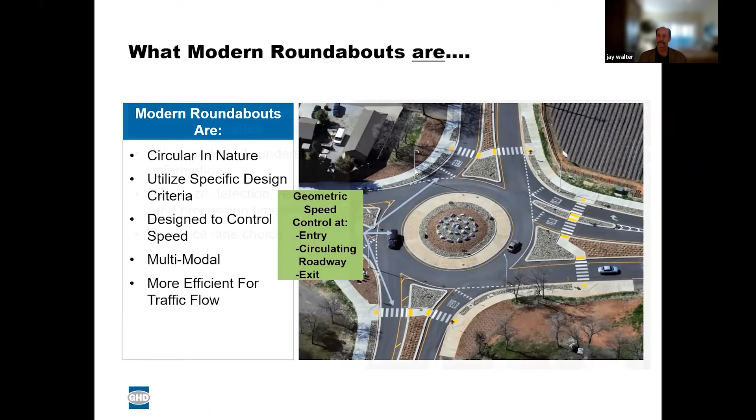So this is a picture of a traffic circle that probably many of you have seen and driven on recently, the one over at the Holman Highway, Highway 68, right there in Monterey. GHD designed that roundabout, and essentially you can see that the markings and the direction that vehicles are supposed to go is easily understood. This is one that has had a really, really good reaction from the community, as well as from a performance standpoint. And it seems that after initial skepticism, residents and folks that need to get through this intersection are finding it meets their expectations, and they're happy about it. It has not created any adverse problems that some had thought it would.

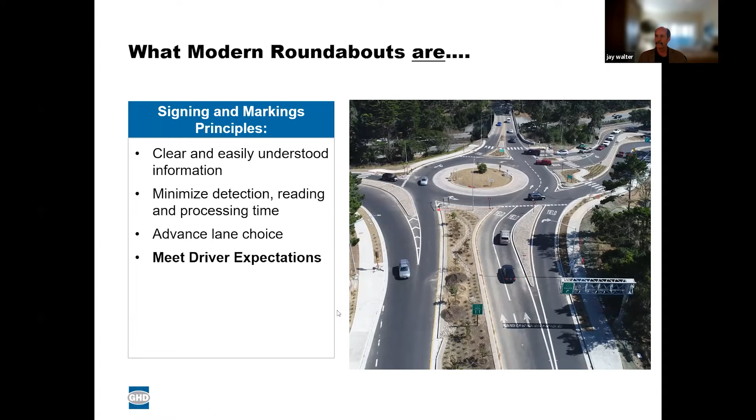So the modern roundabout will accommodate, as I mentioned, persons with disabilities that need special crossing, regular folks that are just trying to get from one side of an intersection to another, cyclists who can go through the roundabout like a vehicle, emergency response vehicles, and large trucks. That's part of what our design does, is it accommodates those large vehicles to be able to make that circle and go in the direction that they want to go in. We'll get into the design elements a little bit later.

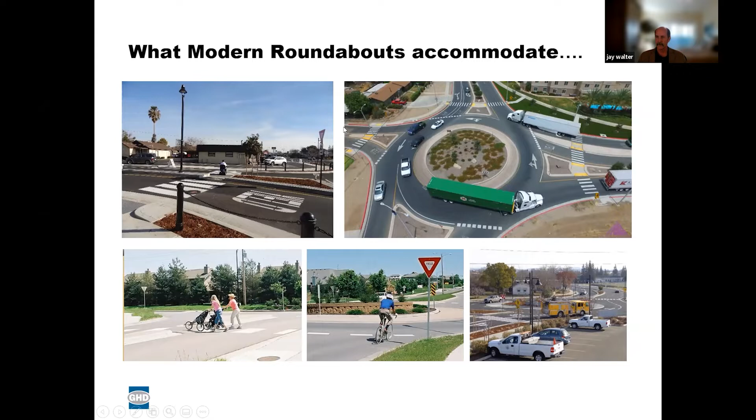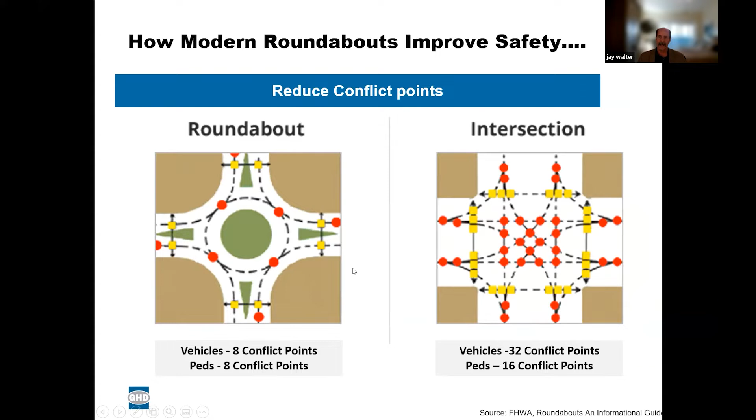And how does it really do that? Well, we call it reducing conflict points. So a standard intersection, a four-legged intersection, as you can see on the right, the vehicles that enter that intersection have as many as 32 conflict points with other vehicles and pedestrians. And pedestrians have at least 16 conflict points with vehicles as they try to cross the street. The roundabout is different. By separating the pedestrians from the vehicles, you reduce the conflict points for both pedestrians and vehicles together. So that's one of the primary reasons that roundabouts have shown improved safety from a collision standpoint.

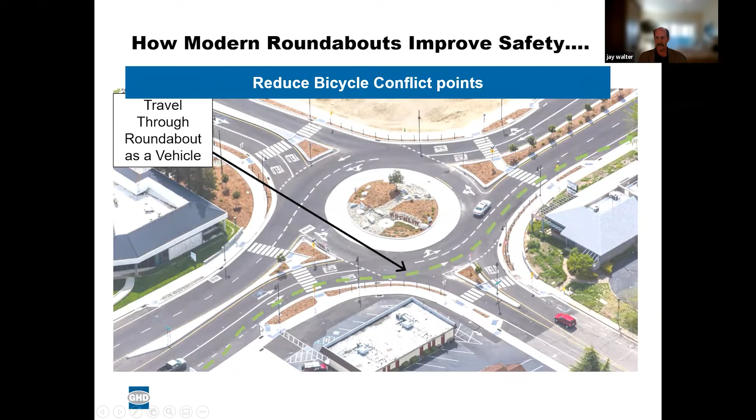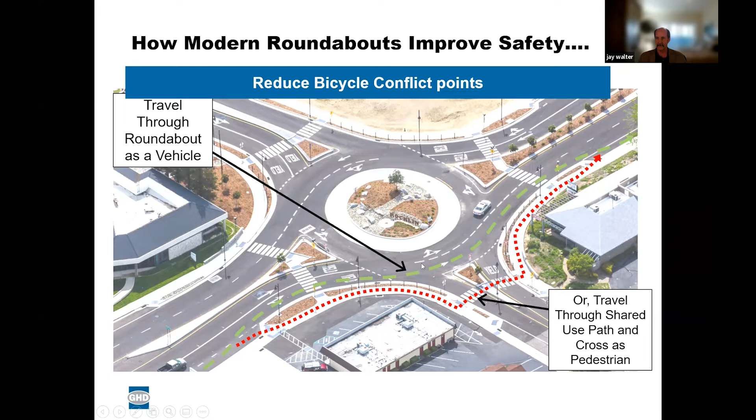From a bicycle standpoint, this two-lane roundabout is one a bicyclist may want to traverse. You can go through the roundabout as the green line shows, following through as a vehicle would in the traveled lane. Or if you're not so confident, you can move off to the side and take the pedestrian pathways through the roundabout intersection, then back into the bike lane. We allow for a couple of different ways for bicyclists to navigate the intersection, because traditional large signalized intersections are often very challenging for cyclists to navigate safely.

Same thing goes with emergency vehicles. There's a concern about response time delays and other issues like that. But the roundabout, center island, and roadway areas are designed to accommodate these larger vehicles as they circulate through. In the City of San Luis Obispo, the fire department and police department have both signed on very well to the concept of roundabouts, and the fact is it does not delay their response times to any significant degree.

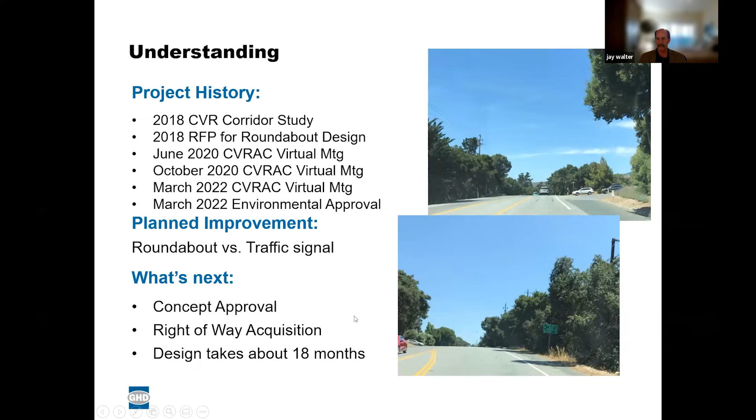We've been making progress, and hopefully keeping the community informed as well. So what's next? Concept approval is certain, and we're moving into the design phase and right-of-way acquisition, which for this project will really be the temporary construction easements needed for the construction project to be built. We expect about 18 months to complete our design, and then we'd be ready to go out to bid.

So we've had some time to understand the intersection characteristics, and we know that from several directions there is limited intersection sight distance. A driver stopped waiting here often has to inch out further before they're sure they can turn left onto Carmel Valley Road, or even turn right. We know there are bus stops, transit activity, and pedestrians in this vicinity, so that will be accounted for in our design.

And we know that there is a serious steep grade that descends down to the intersection coming off of Laureles Grade Road. I'll have more to say about that in a little bit, as we've had some additional direction from the county in terms of what we want to share with you tonight.

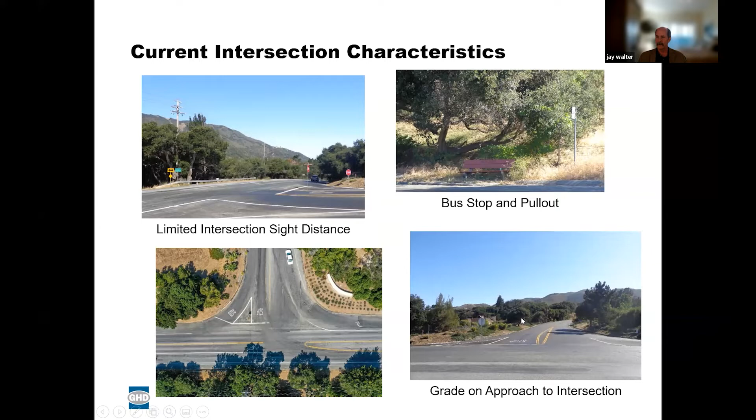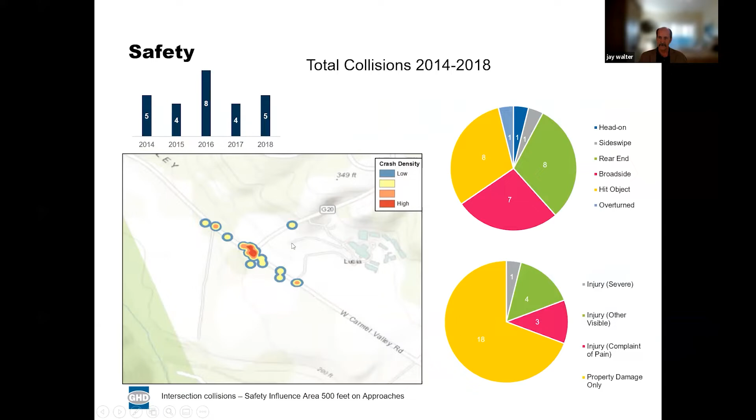So safety at the intersection is obviously a concern, and as you can see, there's been a concentration of collisions at the intersection and nearby. The roundabout is, as I mentioned before, the preferred intersection control to help reduce those collisions and their severity.

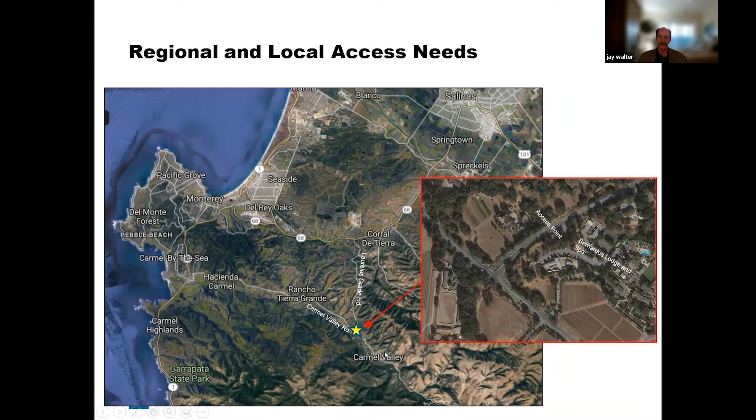We also know that this intersection with Laureles Grade Road, which runs over the top of the hill to Highway 68, and Carmel Valley Road, which proceeds on to the west and east back down into the valley, is a very important connection for regional and local access needs. For the vehicles that have to get back and forth through here, we need to make this intersection as efficient and safe as possible for all users.

We looked at this with a matrix, and we spent some time with county staff judging various things as positive or negative based on the position of that center island. We determined that balancing right-of-way impacts, trying to reduce environmental impacts of these alternatives, making sure we're taking into consideration multimodal use, and also the staged construction of the project, in order to reduce and minimize as much as possible the disruption once it's built.

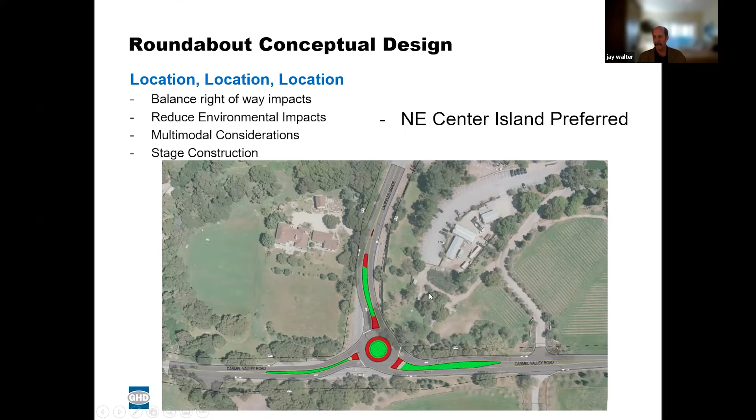So this is the one that the environmental review was based on, and the concept was approved by county staff as the preferred alternative for that purpose.

So we know based on the history here that there are many project issues. Cost efficiencies - we know the county really needs to be aware of how much this project will ultimately cost. We know there are many special events throughout the valley, throughout the year, that rely on this intersection in a very critical way. We know that residents, business owners, and tourists - we want to minimize disruption during construction.

We know there's an element of potential emergency evacuation for these routes, and one only has to be aware of forest fires occurring around the state to know that critical and efficient emergency evacuation is important. And then we know this downhill grade to the intersection - we need to try to figure out some way we can help deal with that.

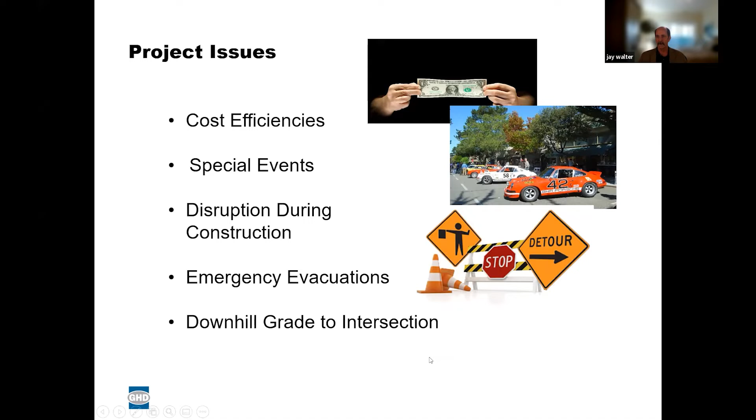It does accommodate a California legal design vehicle, meaning those large trucks we saw in the video can circulate through here, and it has a steep approach on the grade as the project has been built.

Which is very similar to the grade of Laureles Grade coming down into the intersection. So this roundabout was designed and constructed by GHD. We spent considerable time on the design in the middle of this center island and the roadways as they approach, to make sure we didn't have a cross section or slope that could cause a large vehicle, when turning, to get off center and potentially tip over. We call it a hand grading solution for roundabout control in this particular issue.

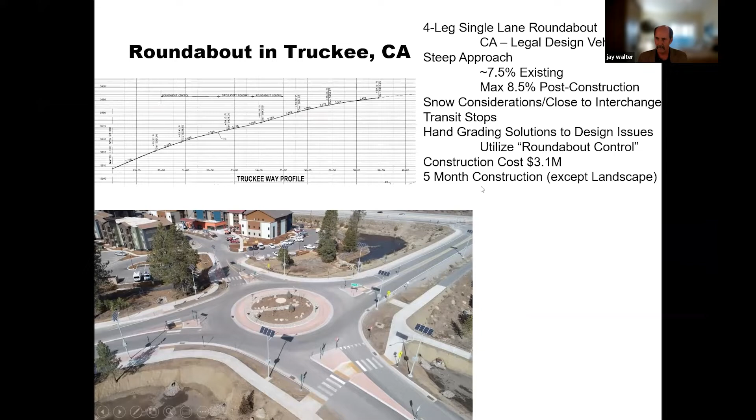And it's something we've gotten very good at. The project took about 5 months to construct, not a large amount of time, but similar in some degrees to what we're trying to do here.

So controlling speed is important. As you can see, these have the necessary deflection to help do that.

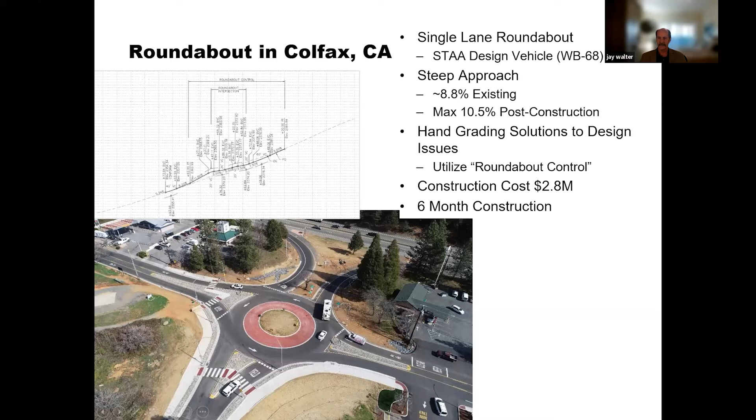So one of the things about emergency evacuation is there have been a few studies across the country about the use of roundabouts when it comes time to evacuate folks from areas because of storms and other things they need to be leaving an area from. The conclusion has been that these roundabouts aid in evacuation attempts.

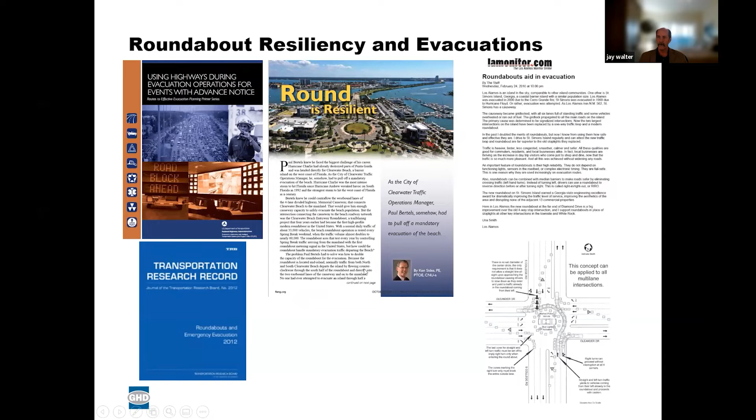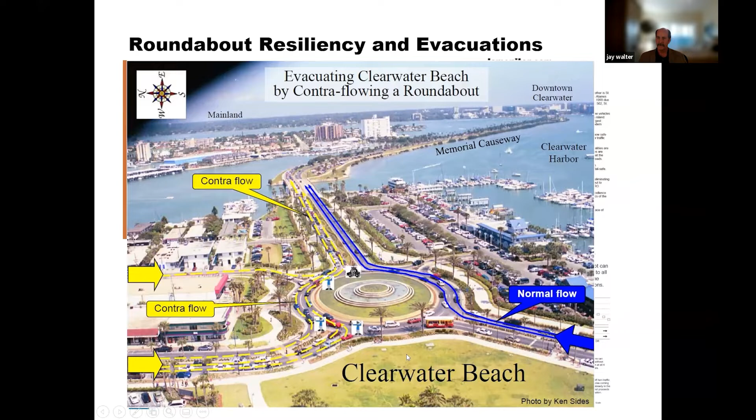One example is Clearwater Beach, where traffic would flow into the roundabout from a couple different directions and in and out of that roundabout, with the goal of getting them across the causeway back to the mainland. You can see that this flow can be blended in the same direction away from Clearwater, which needs to be evacuated. The roundabout helps separate and segregate that traffic, so it's not everybody trying to merge through the same conventional intersection at the same time. So we believe that in contraflow situations like this, the roundabout can help in terms of organizing those evacuation efforts.

So let's get to the issue of the steep grade and what we need to think about for truck accommodations. On Laureles Grade Road, the county has a number of locations with signs that warn truckers about the grade and the need to use lower gears so they don't get out of control with speed and have to rely on brakes to slow down and stop.

In the general vicinity of the intersection with Laureles Grade, there's a location primarily just before the last curve as you're coming down the hill to the intersection, where the grade is 8%. That's similar to those roundabouts we were just looking at, but we know that's a challenge. So as that 8% approaches this roundabout intersection, we're going to have to carefully design the center island, the circulation area, and the entry and exit points to make sure we don't cause larger vehicles to tip or get uncomfortable as they're trying to navigate it.

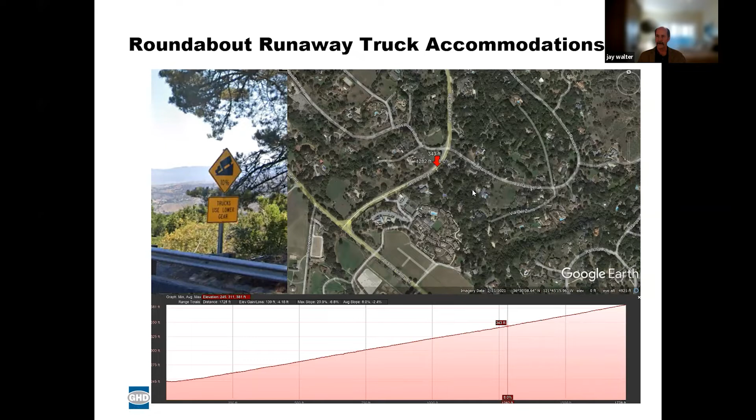But from a runaway truck standpoint, this is kind of the last run down the hill. And what we're thinking about, at least in the short term, we've talked to the county about this and identified a couple of options we might want to consider for runaway truck accommodation. This is a location approximately where I was showing you on the previous slide, right after the curve coming down to the intersection.

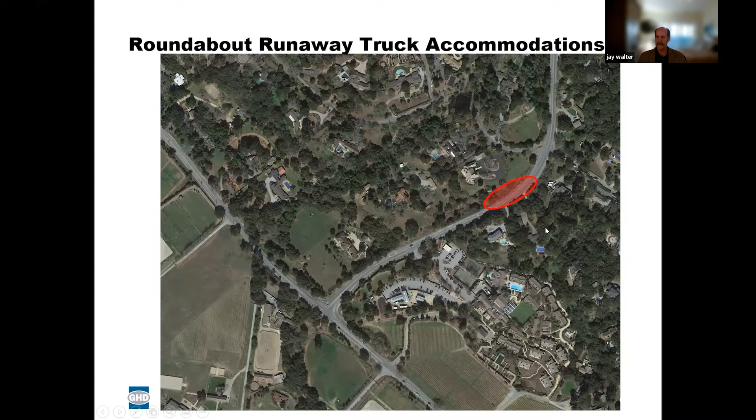What we want to potentially consider here is this area to the right, which could be modified and graded so that a truck might be able to take refuge here. It's a small area, but it could give a truck driver an opportunity to get off the roadway before he got down to the intersection. We don't know exactly how that would work yet, but if the county wants us to study it, we believe we have the experience to come up with a good option here.

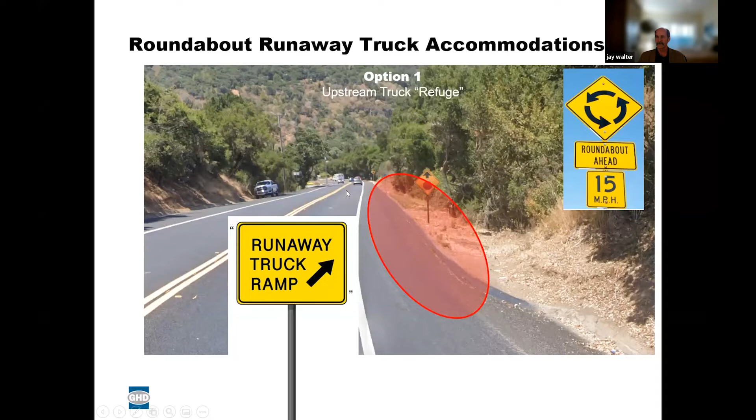Signage is always important to let truckers and drivers know what they're coming up to next.

So a second option, as we look at the way the roundabout is initially placed, one location close to the corner, this area is currently set up as a stormwater detention basin, so it'll be slightly lower than the area next to the roadway. That provides another opportunity, potentially option 2 for a truck refuge here. It's not potentially ideal since it's so close to this intersection, but it could be something that gets considered.

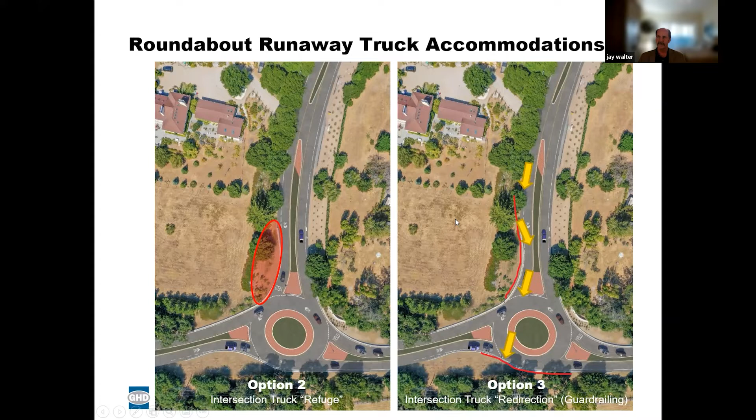The third one is a little different, and I'll explain more about this in practical application in a minute. But basically this involves utilizing metal beam guard railing so that as you come down close to the intersection, the truck would edge up against the guard railing, which begins to create friction and cause the truck to slow before reaching that final point of crossing into the intersection. Then potentially we have guardrail on the other side, which keeps them from getting into the creek. I'll explain more about this process in a minute. So those are the 3 options we've been thinking about in conjunction with the county for this project.